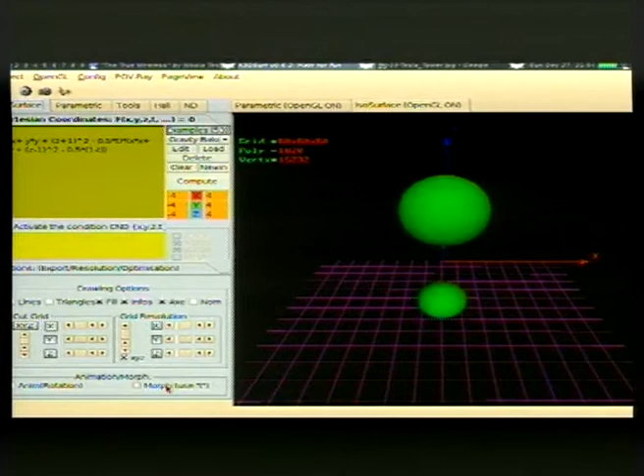This is our AC. This device would not be suitable for wireless energy transfer because the charges will be plus on the upper ball and minus on the down ball. And if you see these charges from a long distance, you will actually see a neutral charge.

But the idea is that the ground was used. So if this charge back there was below the sea level or in the ground, then the observer above the ground will only see charge going plus from nowhere, then going down to zero, and then again to the minus. This was the idea of how to separate a normal dipole radiation from something else that was used here.

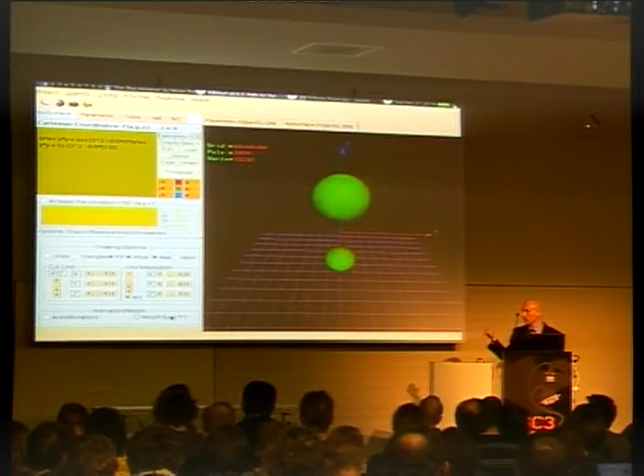And how could it be done with the electrical device is by using the resonance. And for this we have some more calculation up here. Wait a minute.

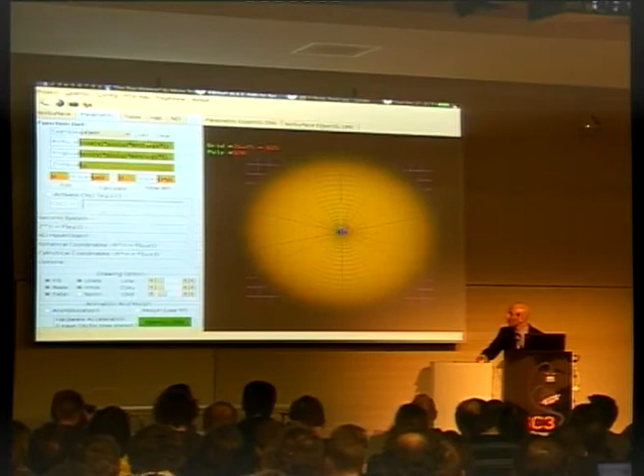This is something called quarter wave resonance. So imagine our coil, or the bottom coil of winding of the magnifier of this antenna, is in the z-axis above, and the dimension of this is actually the electrical field created by that.

So we want to send a wave through this. So the wave can go up and reflect down from the capacitor back, and something which is done is something like that. But there are two ways, up and down.

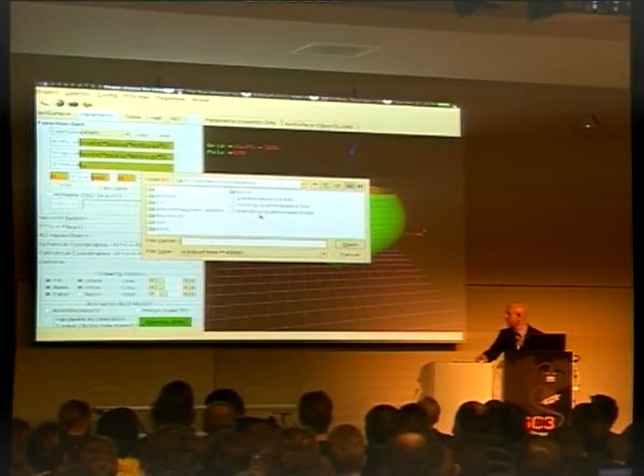We actually would have these up and down waves go immediately at the same time, so they add one to each other, and what actually happens is the sum of two waves, and then we get a standing wave inside of the coil. And the coil resonates as one.

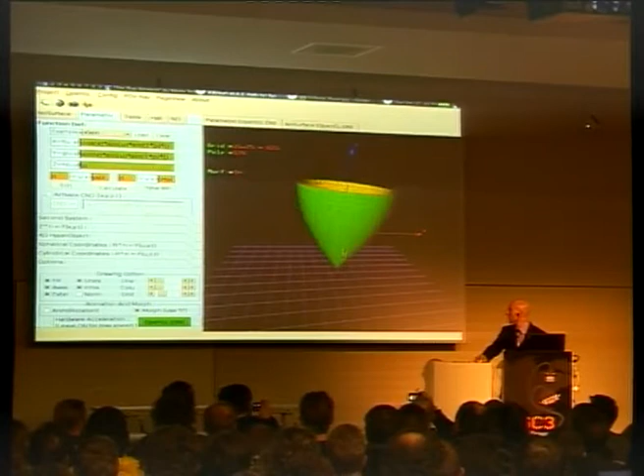So we get something like that. Every part of the coil is synchronized when it is done right. That is what is written in the text of Tesla's article from 1919.

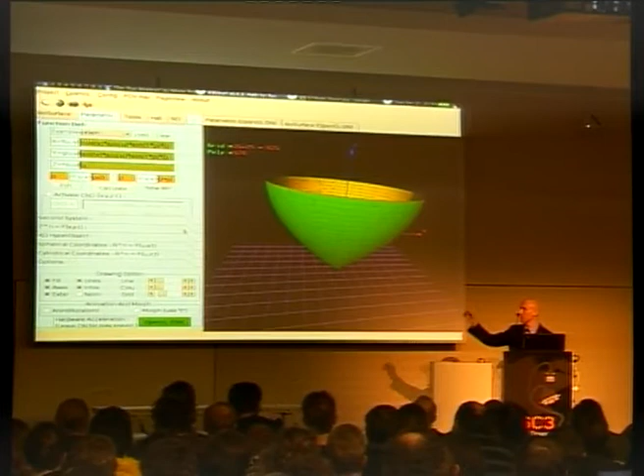Okay, so I had some information about the principle of working, and now I started to make a device, and I needed some more calculations. I will show you my simulation to get a better picture of the difference between a normal antenna and what we want to use with this device in terms of the field in the space.

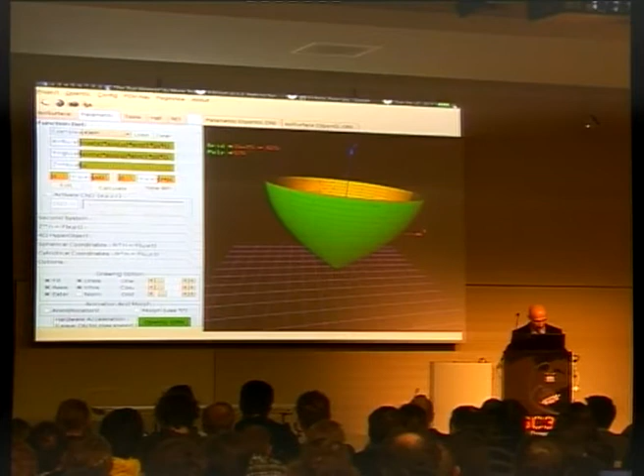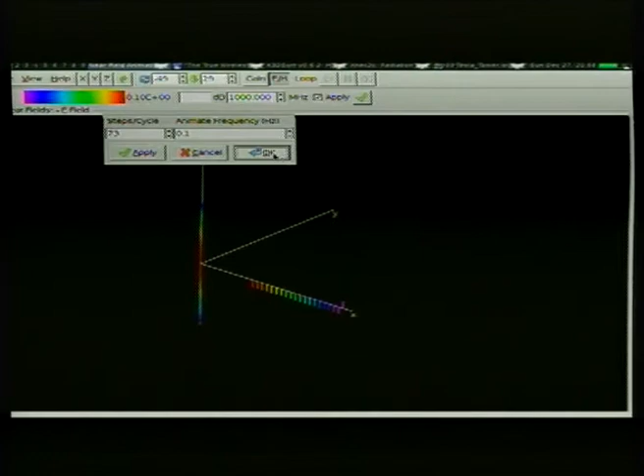So when this works, when this antenna is powered with alternating current, some kind of wave goes away from the antenna. This is only the electric field shown.

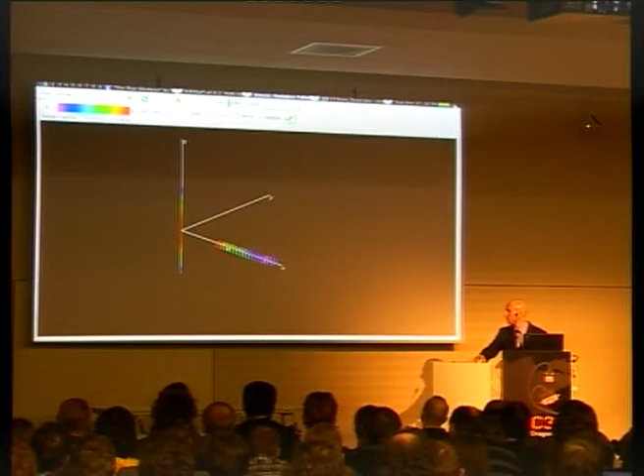I can show you here also the magnetic field. So both of these fields, if you can notice, are perpendicular to each one. There is a right angle between them.

This is normal electromagnetic radiation. It consists of the electric and magnetic field, which are at 90 degrees in the space to each other, and as well 90 degrees to the direction it propagates.

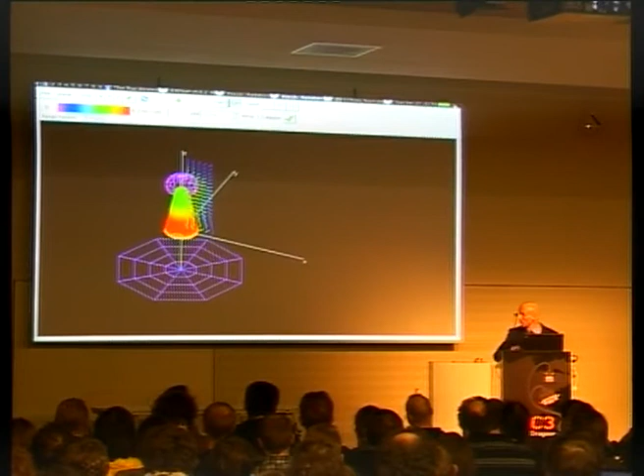We will stop this one and look at Tesla's simulation of the Tesla tower. What does it produce there? Okay, this is the Tesla tower, and this is the electric field from his tower. I can explain what that is.

Tesla, in this tower, in their building — it is not shown on the picture — has a ground connection about 50 meters below the ground level. It needs to connect to the Earth. So this is some kind of network. It's not the same like Tesla did, so this network was somewhere here above, but I think it doesn't matter to this simulation.

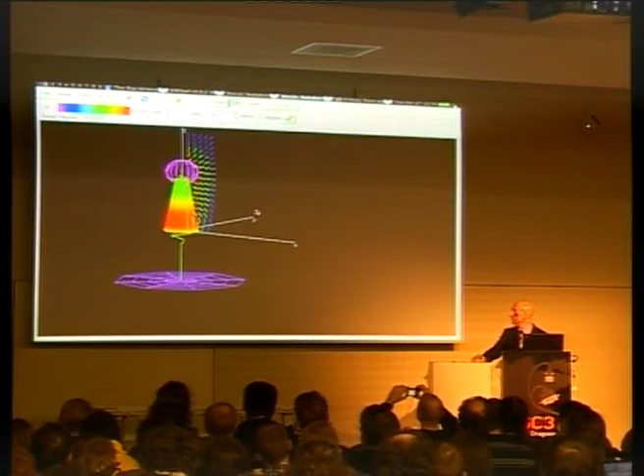What this device produces, we can see with the animation. So actually no wave is traveling in the space like before. It just creates the electric field that is stronger in the plus, and stronger, of course symmetrically, in the minus, identically all around here.

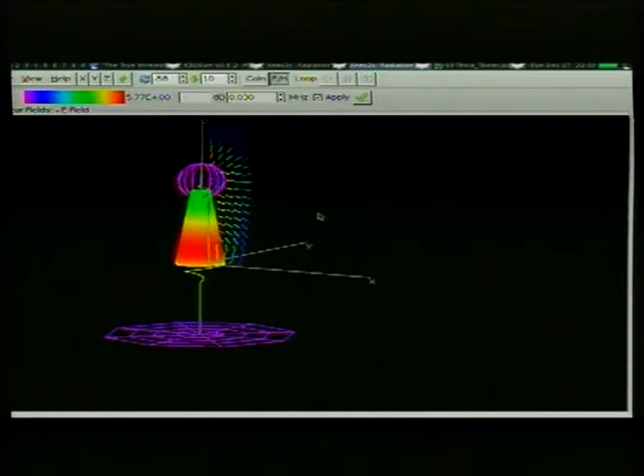Here we can see something like spherical symmetry, not complete, but similar to it, because all of these field lines are on the identical place. Yes?

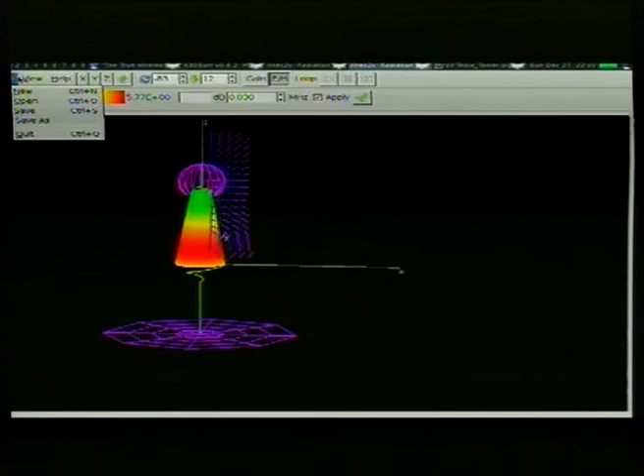You want to see the Poynting vector? Okay, we can do it. Yes, okay.

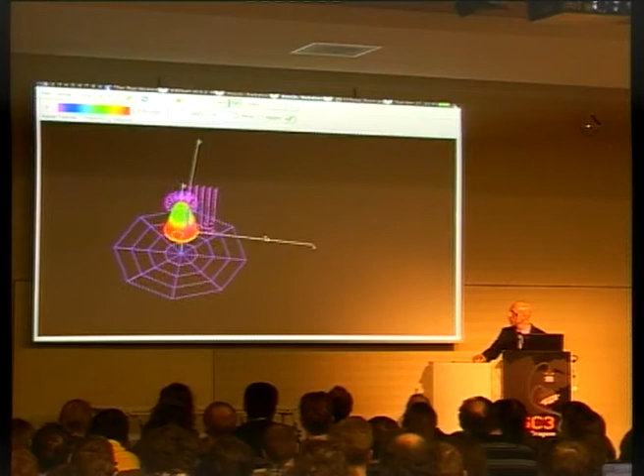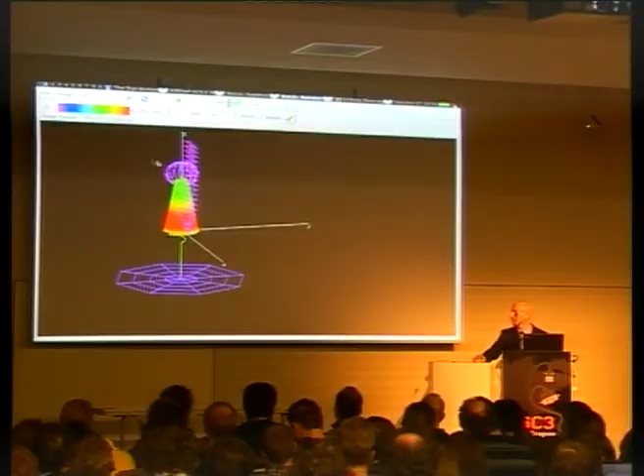Okay, the Poynting vector is — it's not easy to imagine — but the Poynting vector is somehow circulating all around this device. Actually, the Poynting vector is nowhere, because the electrical and magnetic fields are nearly in line with each other. So the Poynting vector is, as you can see, violet in the first place. This is near zero, okay, not always, but somewhere here it has some.

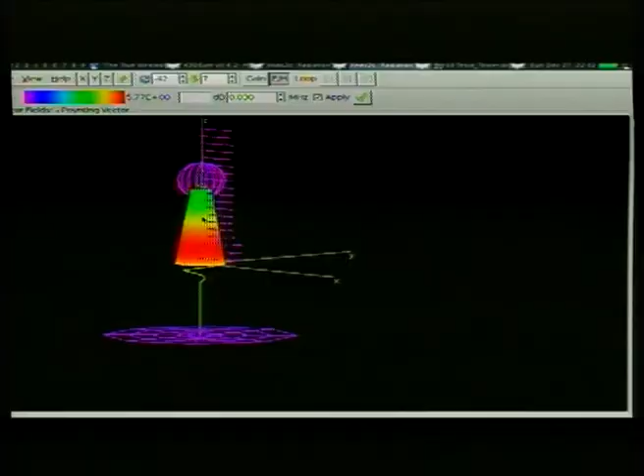This device radiates a little bit. It's not possible to make a perfect geometry of this device so that you can have only the electric field, but the magnitude of the electric field is much higher than the magnetic.

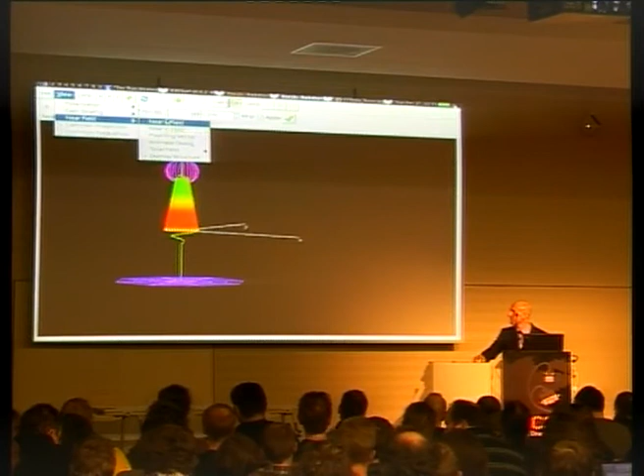Okay, this is exactly what I want to show you, but I must first show you this, and then look at the magnetic field. I will stop the electric.

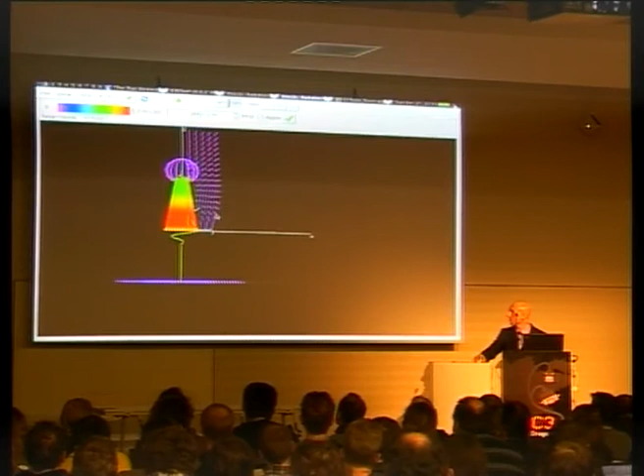So the magnetic field as well is actually in the violet range, so it's near zero, except in the middle of this coil, which has some magnetic field.

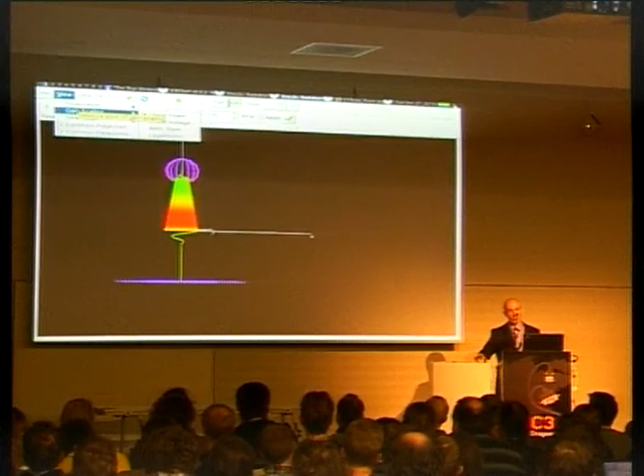I would show you at first some kind of device that I designed, the same like that, and then I will show you a simulation of two devices connected to each other only with the ground that actually transfers power. Okay, we don't have radiation here.

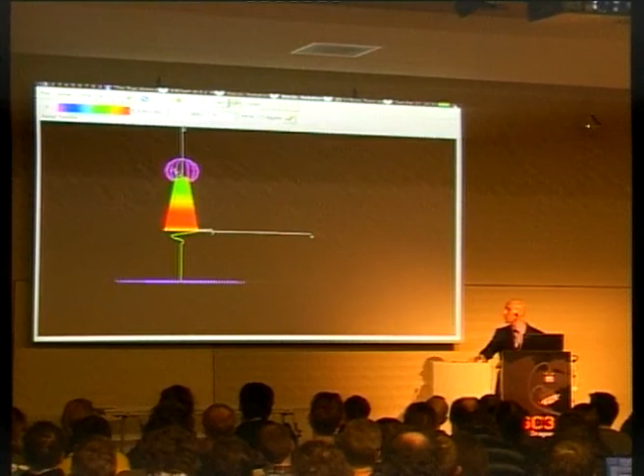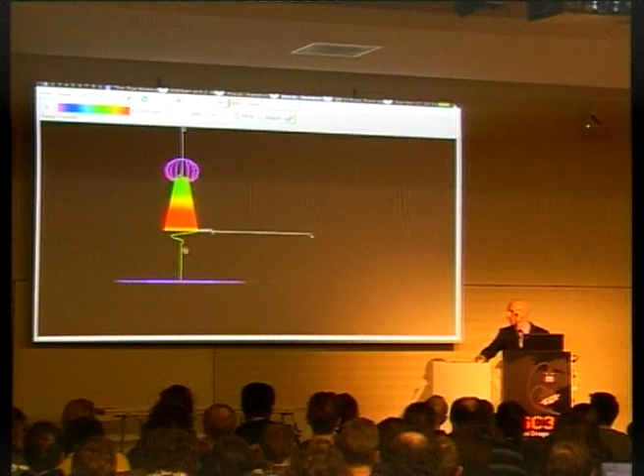What happens is the ground. We should not forget that we have one common connector, and that is planet Earth. So it is used as a charge capacitor conductively. Earth as a soil has conductance, has capacity, and some inductivity as a medium.